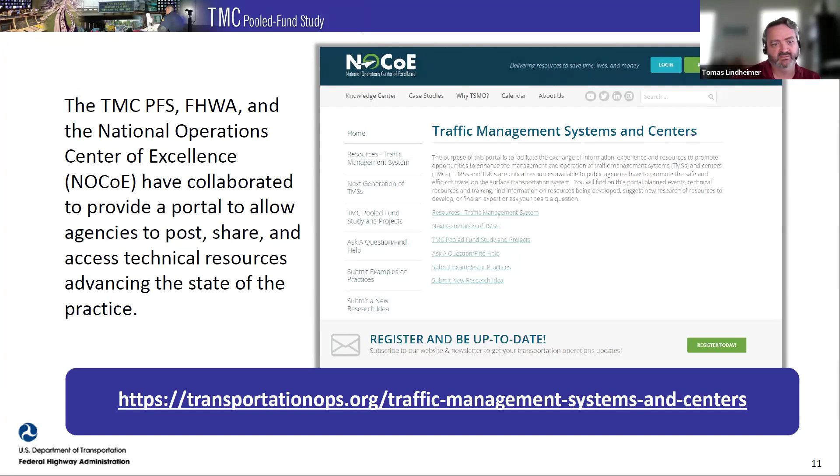NOCoE and FHWA are co-sponsoring webinars on each of the TMC Pooled Fund studies selected. Today's webinar is about using variable speed limits during adverse weather events, but we have regular webinars every other month on 12 emerging TMS topics through 2026. Visit NOCoE's TMS emerging topic website for more information.

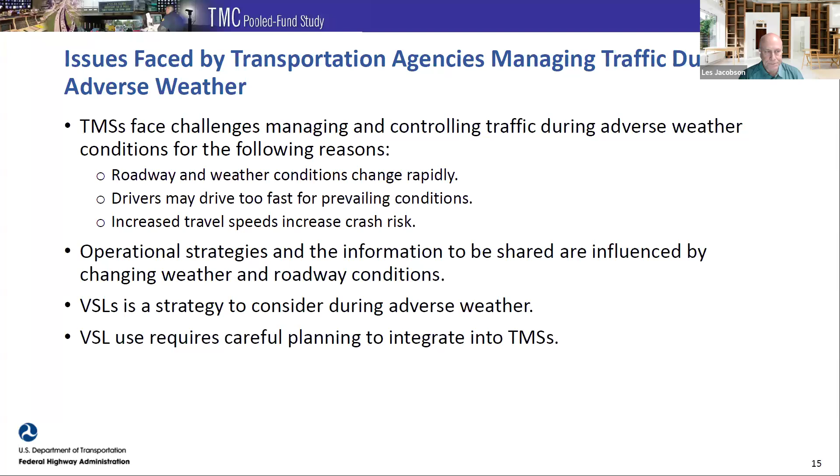Variable speed limits, or sometimes variable or dynamic speed advisories, but mostly for weather it's variable speed limits, help to manage traffic, to slow traffic down, to improve safety and reliability when there's adverse weather. Agencies will alert drivers of what the conditions are, and then encourage them to slow down by posting a lower speed limit, and then also displaying the conditions they're about to experience on changeable message signs.

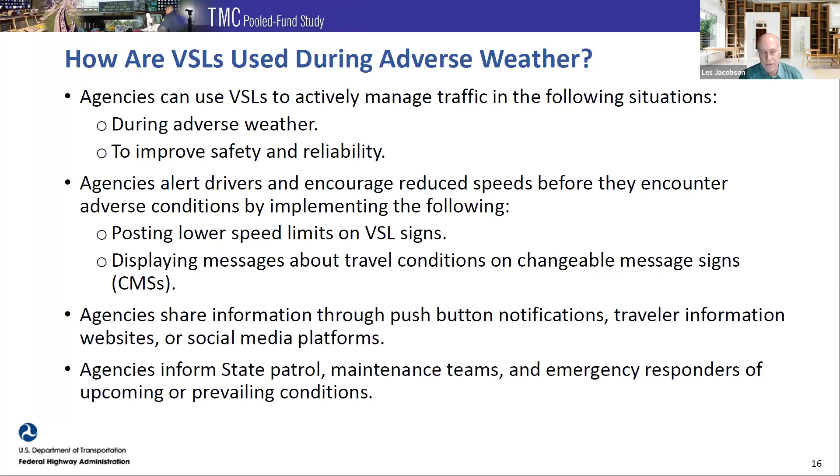Agencies will also share information through a lot of different notifications, through traveler information websites, on social media, a variety of ways that they can share that information to drivers and to the media and others who are interested. They also will inform other public agencies like state police or state patrol, maintenance teams, emergency responders, all of the people who may need to deal with traffic in adverse weather conditions.

Some of the benefits we've seen from variable speed limits in areas with adverse weather: first, to improve safety and reduce the number of crashes. I think that's the number one benefit, and that's why we have it listed here. It's primarily a safety issue. It also helps reduce crash-related road closures, helping with maintenance overall and reducing the load on maintenance workers and maintenance funds. Also, it increases driver awareness on why travel speeds are being adjusted and the importance of slowing down in these conditions.

We've also seen positive before and after results. For example, Ohio DOT showed that they reduced crashes during snow events by 35%. Ryan will talk more about that later. They also decreased injuries and fatalities from 20 to 9 crashes per year, a pretty substantial reduction. Wisconsin DOT found that they reduced average vehicle speed by 13%. And Utah DOT found that they improved speed limit compliance and significantly reduced crashes as well.

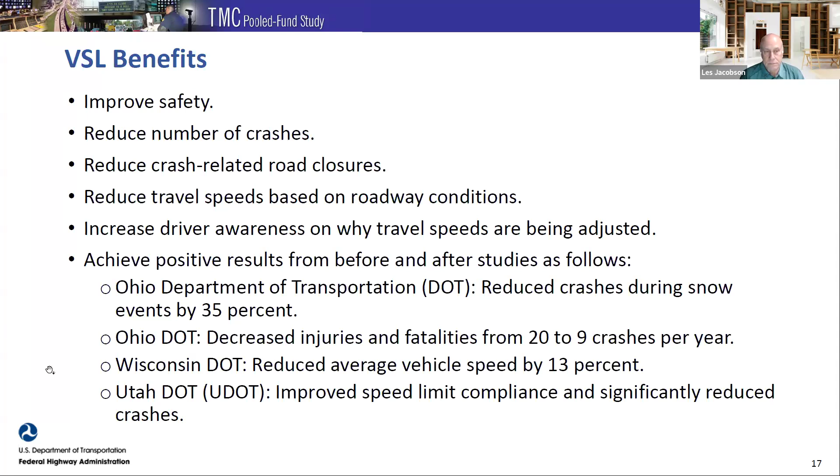So what people want to do reflects a lot of those benefits. Generally, the desired outcomes of using VSLs during adverse weather is to improve safety, to improve travel time reliability, to reduce vehicle speeds and speed variations, and to improve driver awareness of the adjusted speed limit and compliance with it. A lot of studies have shown that if people understand why they've been asked to slow down, they're more likely to slow down. I think that's one of the most important things.

Also, you want to be able to manage that variable speed limit based on changing circumstances. So it needs to be somewhat dynamic, so those speeds can be changed based on the changing roadway and weather conditions. Also, another desired outcome is to share information and coordinate with emergency responders and service providers.

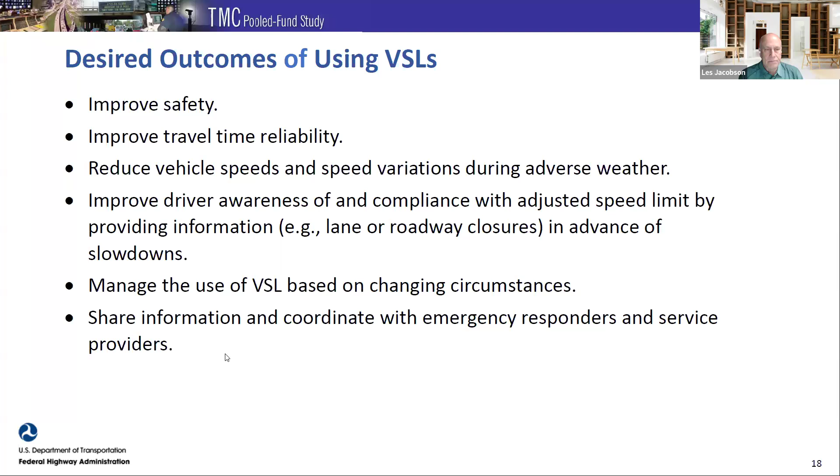Some of the things agencies consider when thinking about using variable speed limits during adverse weather conditions is, first, enforcement: should there be regulatory or advisory speeds displayed? I think very often with adverse weather, the regulatory might be more important. That's a personal view of mine. I think it has a bigger impact.

Also need to think about effective sign locations. Where should the signs be? That will depend on what the normal weather conditions are and how far in advance speeds can be reduced and reduced effectively.

Also, what other operational strategies should be incorporated into this overall traffic management during adverse weather? It's important to realize that the benefits can vary quite a bit from site to site, and there's a lot of uncontrolled factors, such as the mix of motorists and how aware they are of the events that are going to result in variable speed limits. People new to an area, not experienced driving that stretch of roadway at that time, may be less aware, and that can affect how beneficial it will be.

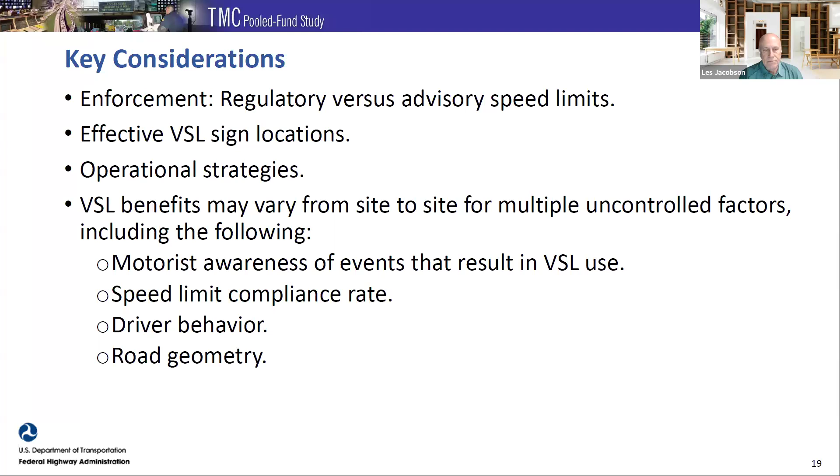Some of the challenges with implementing variable speed limits: because benefits vary from site to site, that's a challenge when trying to say what those benefits are. In some places they may be lower, some places higher. As one location opens after another, there may be some that have better benefits than others, and people can question why, if there's a drop from one location to another, why did you choose that.

Typically compliance is lower if the speed limits aren't enforceable. Another challenge is that areas across the state or region may benefit from knowing when and how to change speeds, which means there's a challenge in getting that information out to the driving public, and then conveying the relevant information so they understand why and how variable speed limits are used. Finally, sometimes there are challenges applying policies and procedures consistently across a region or state.

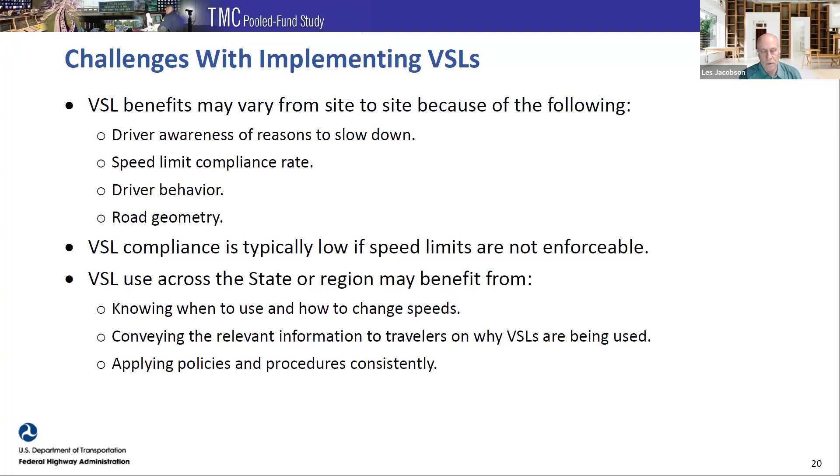Some of the support for using and managing VSLs includes traffic management systems needing the capabilities and resources to support actively managing those variable speed limits. That's one of the most important things about dynamically managing variable speeds: having a central place that it can be controlled from, a traffic management system that can do that.

Those traffic management systems need to be able to collect and process data. They need to disseminate information to travelers, emergency responders, and other people who need to know about the conditions. And then the TMSs need to continue to monitor how weather is affecting traffic.

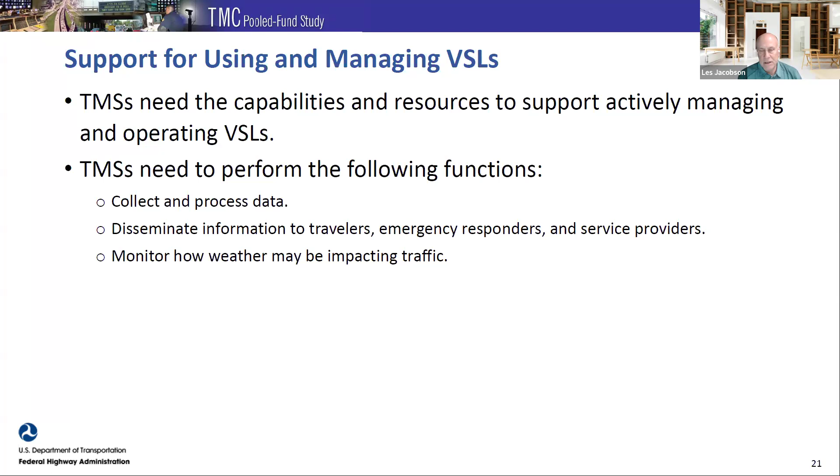Some of the issues to consider when incorporating variable speed limits into your traffic management system include thinking through the operational requirements of the system. Those requirements are pretty similar to a lot of other traffic management system strategies. There's also probably a need to establish formal operating procedures for when the variable speed limits are operational, and how to support and operate the system.

The traffic management systems may also need to automate the operation of VSL, depending on the conditions and how quickly they change. But at the same time, an operator needs to be in the loop so they can monitor what's happening with the system, make sure it's reacting correctly, and make changes if needed based on experience and different conditions. And then the TMS needs to be able to communicate with responders and other agencies.

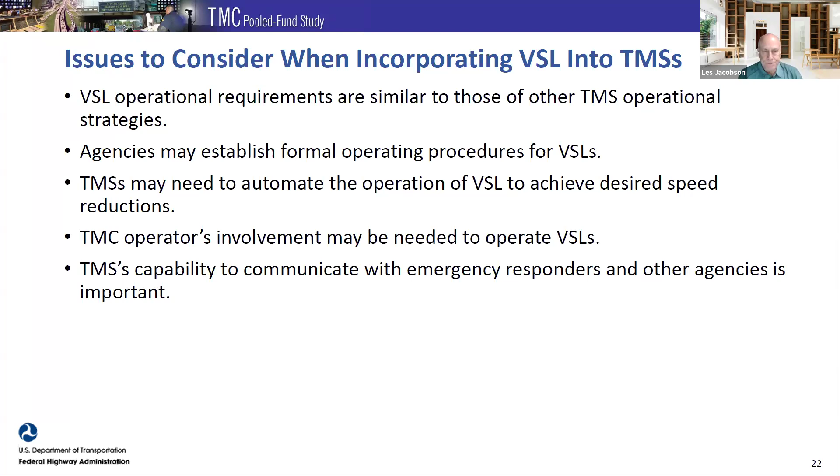There's also the benefit of having variable speed limits with changeable message signs, as we've mentioned throughout. That's a way to get information to the driving public, and they're important for traffic control purposes. The messages need to be easy to understand, just like any other changeable message sign, and there are documents that can help show how to effectively use CMSs.

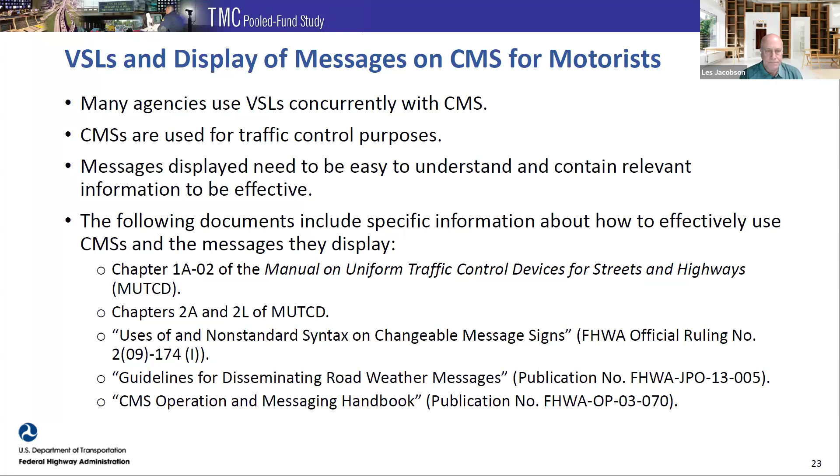Here are some considerations. It's really important to know what your staffing needs are going to be, including number of staff and how to train them. It's also important to think about whether this will be a regional or statewide implementation. Finally, review the processes and procedures that are needed, and evaluate the availability of the devices to provide travel condition information.

I'll show a few slides on some of the things that occur. Typically, a scenario for changing speeds might involve information about expected snowfall. The operator decides to change the speed limit, or the system sees that there are changes. Other things may occur too - visibility declines, grip factor might decline - and based on those changing conditions, the operator looks at adjusting the speed limit.

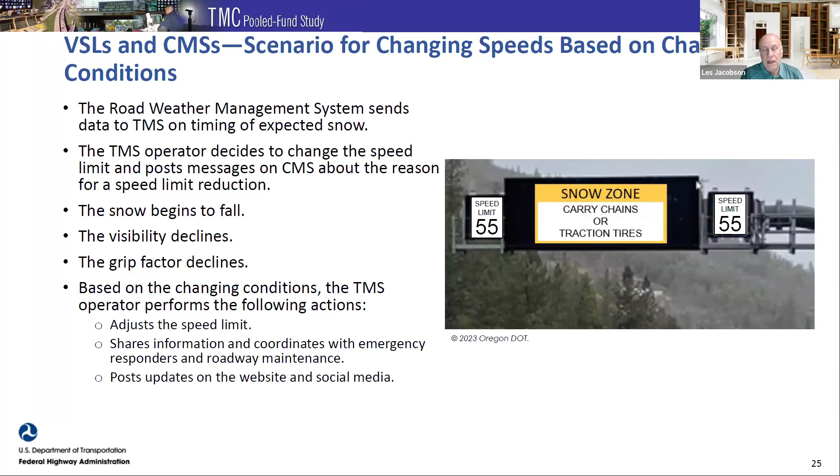Ryan's going to talk more about Ohio DOT, but they looked at staffing and training needs, and he'll be talking about that. Oregon DOT integrated their speed data and closed circuit TV into their TMS to help with the variable speed limits and changeable message signs. A lot of DOTs have deployed VSLs along routes with a history of crashes, and Ryan will talk a bit more about Pennsylvania's experience.

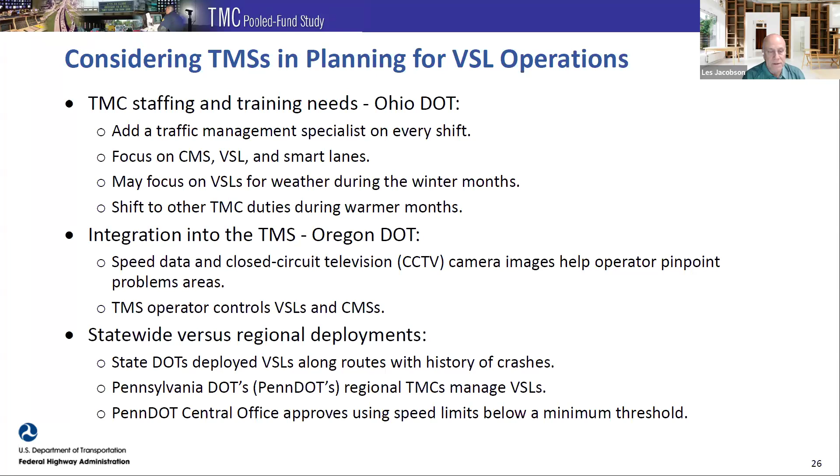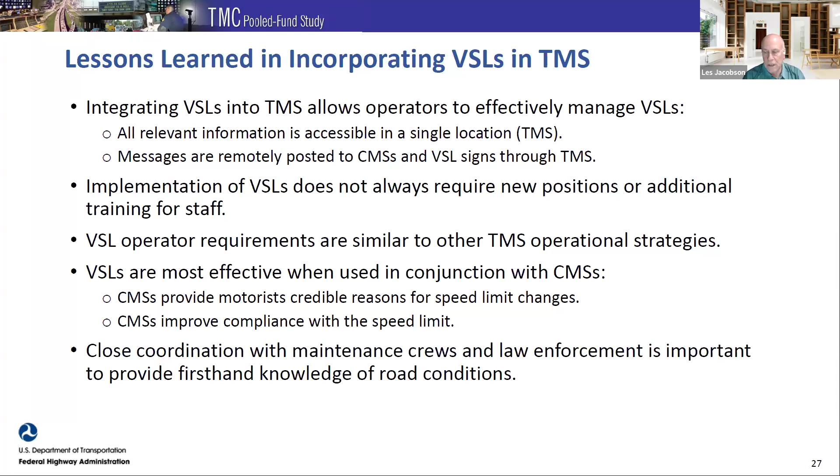Some of the lessons learned include: it's important to integrate VSL into TMS. The implementation of VSL does not always require new positions or additional training of staff - it depends on what staff there is and their experience. But it's important to note that the requirements for operators are similar to other TMS operational strategies. And the use of variable speed limits is most effective in conjunction with changeable message signs.

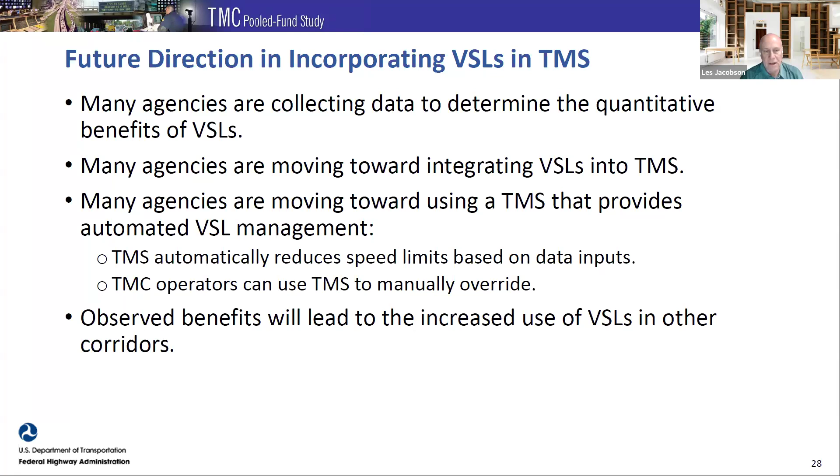Some of the future direction includes collecting data and being able to show those benefits. It's also important to look at how one corridor or one segment of VSL can lead to increased use in other corridors as well.

Thank you very much, and I'll pass it back to Tomas.

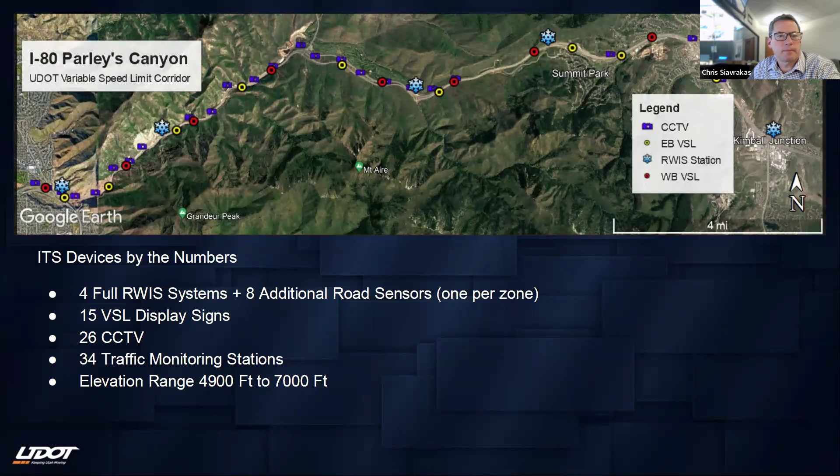A little bit more on the zones here. So we originally had this as where the region traffic engineering staff would change the speed limit based on their observations of looking at camera images, looking at speed data, and they would make a determination. The zones were broken up into just a couple areas. But then once we went to automation, we increased the number of zones, basically bringing them to much smaller segments where we can change the speed limits. So basically every speed limit sign can be different from the one downstream of it.

Now we have some parameters to keep it smooth so we don't have huge breaks in that change, but we went through a pretty significant shift from our first variation of the speed limit system to bringing in more automation components. What happens there is that all the traffic monitoring stations are picking up the speeds from travelers on the roadway already there, and they're helping us determine what the speed should be. We kind of call that voting for the speed. That helps the algorithm figure out what we should be posting on the upstream sign of that zone.

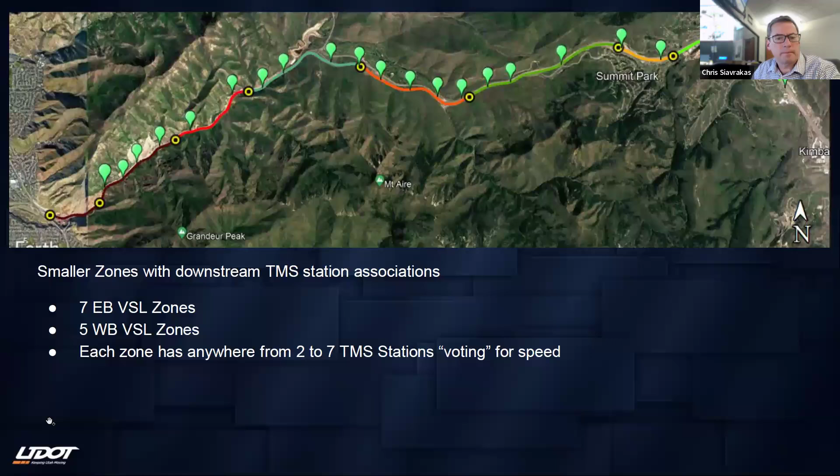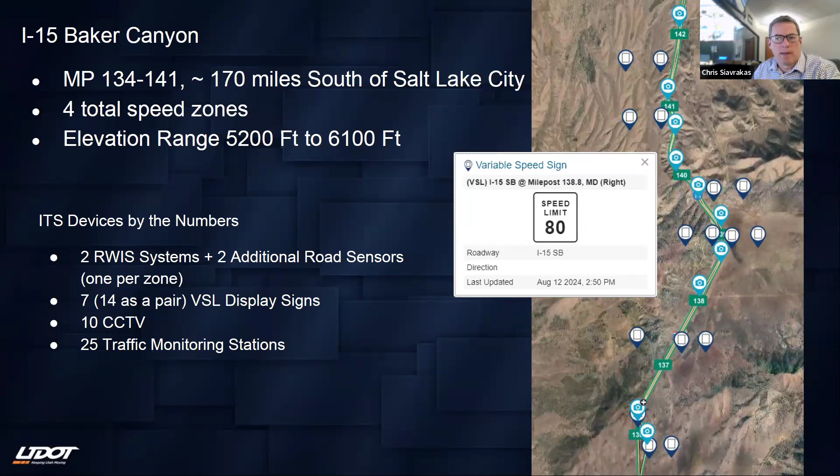It's white knuckle moments where you're trying to just navigate this corridor. You're trying to get somewhere. If you had a choice not to be there, maybe that's your better choice, but sometimes people still have to get through the corridor. Helping them understand what those travelers downstream are doing with their speed helps us make the calculations on the speed as they're entering the corridor, so they know how to target their speed if they're unsure of the situation they're dealing with. It just helps reinforce where they ought to be trying to find their target speed for what's lying ahead.

For about 10 years we've been working on this technology, going through a couple rounds. I mentioned our automation development, and the exciting part about this, I want to give time to Cody after I'm done here to talk about the weather aspects of how we use weather information to change the speed limit. We've enjoyed having this experience and time to develop and improve steadily through the life cycle to date.

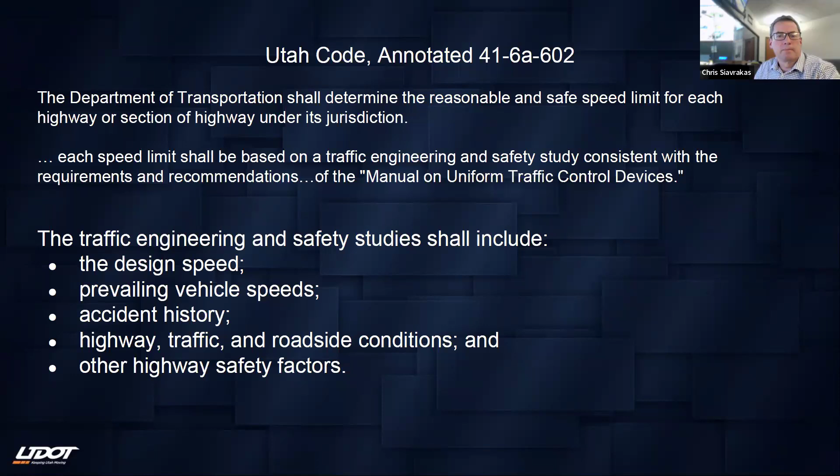So in reference to how we can do that, our state law gives us that authority to do so.

This is out of the Manual on Uniform Traffic Control Devices. There are two sections that discuss engineering study, and the procedure we're talking about here is the application of procedures and criteria established by the engineer. We have an engineering team that reviews this and decides how this process is going to work. That's our interpretation of how we're applying that authority to make that determination in real time for traffic speed limits.

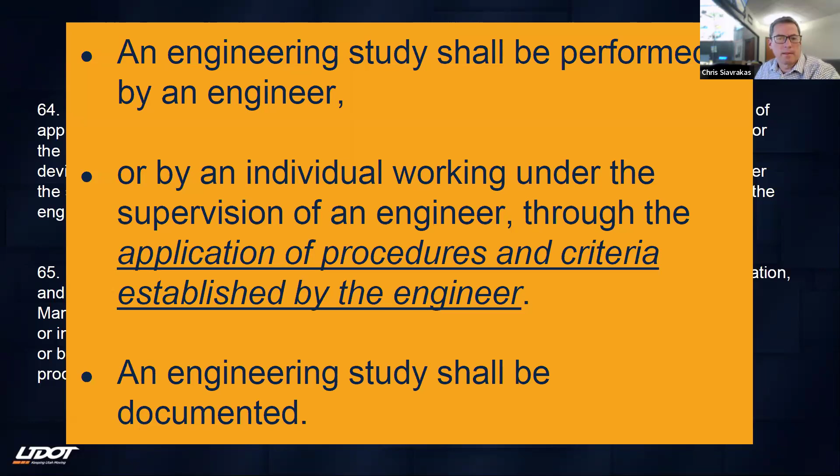Okay, next slide. So, challenges I've mentioned before: in Utah we subscribe to the prima facie speed law, or basic speed law as it's also referred to, which is basically whatever is reasonable and prudent for the prevailing conditions. So we have to take samples of what the population decides is safe for them to navigate that corridor, and we average that to come up with a number that should be the speed other people follow. That's why we call it voting for the speed - they're basically casting their vote when we collect that data sample from a sensor. That's their choice of what they think the speed should be.

But the sample size is impossible to make statistically significant because it's going to change every 3 to 5 minutes. We may only get a dozen, maybe 100 vehicles on a busy day through a corridor during a few minutes' interval. So we have to be comfortable making that change within a small sample size.

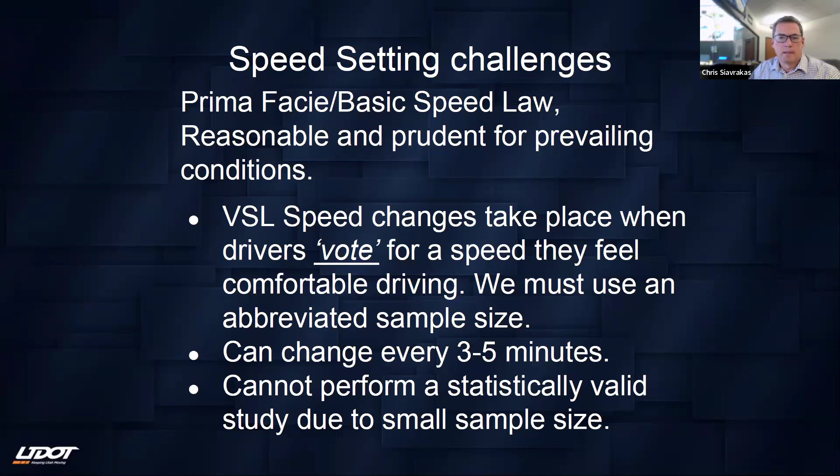We also anticipated that we don't want to get stuck in the records request process. We basically publish on our website all of the commands for each of the signs that give the speed to that sign. Now, we can't prove what was actually posted on the sign - we can only demonstrate what was given from our TMS software as the instruction to the sign. So Highway Patrol, citizens, or anybody wanting to do research can go to this website link, download it, pick the signs they want, and export it into a CSV file or a PDF. We don't get involved in the records request process; we just make it available to anybody.

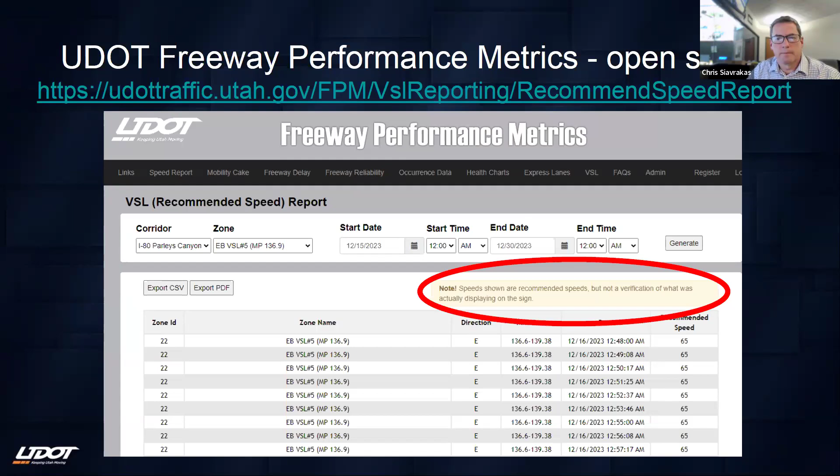As Chris mentioned, we wanted to see how we can integrate RWIS into this. Most states utilize RWIS for their VSL system. So initially when we did manual changes of the VSL speeds, the operators or engineers looked at weather data, but most of that manual transition was delayed. There was pretty good latency. And then the automation was solely based off speeds, as Chris talked about.

But we wanted to see what we can do with the RWIS data to improve things. So we decided that when weather is coming in, we wanted to get speeds lowered before drivers have to start to react to the changing weather conditions.

So what we decided is, when we see some variables indicating weather's coming in, we'll lower that speed limit ceiling, as we'll call it, down 5 miles per hour in Parleys, which we haven't initiated yet, but hopefully this winter we'll have that going. And 10 miles per hour on the I-15 section, since it's a higher speed limit there. After that speed limit ceiling, the vehicles voting drops the speed further. But the whole idea with RWIS is just to catch people initially and get them to slow down.

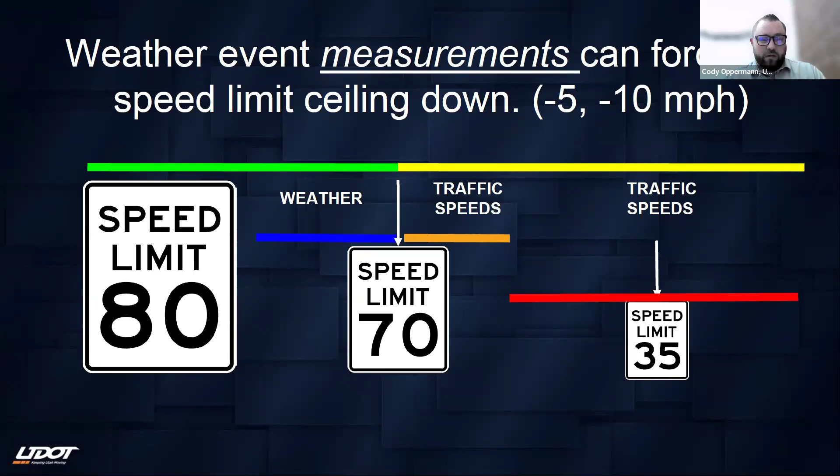There are 5 different things we look at. I was looking at Wyoming's slides, and they do a similar thing, and I think other states do too for certain weather scenarios. We look at a sample RWIS tower here with the different instrumentation being used: standing water on the road at a specific value, low visibility, high winds, the road grip or coefficient of friction deteriorating, and a complicated algorithm for snowfall rate.

If we start to see any of those observations showing deteriorating conditions, that will trigger the lowering of the speed limit ceiling. We originally had 10-minute observations. To reduce latency, we went down to 5-minute observations. Because we want to see a deterioration in conditions, as well as weed out any one-off bad observations, most of these conditions take 2 subsequent observations to show a deterioration or that conditions are bad enough.

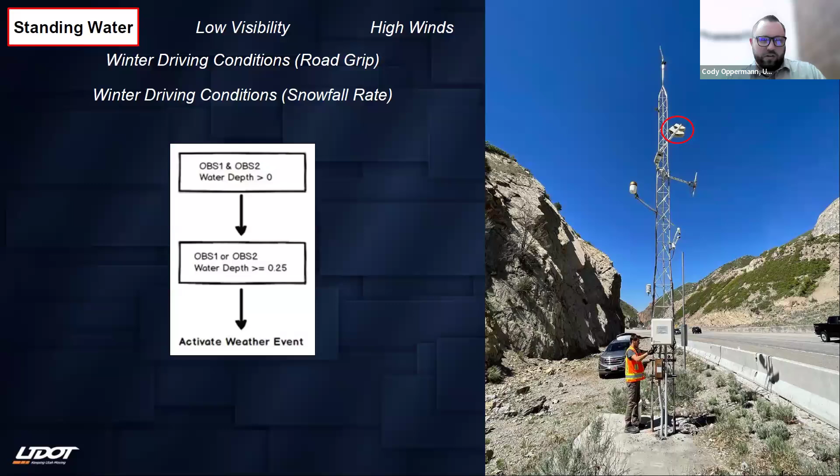I'll gloss over the next few slides, but you can look at these flow charts for what initiates a weather event. For wind gust, we trust that data enough that if there's a strong wind gust for one observation, that will trigger the VSL. Both of these corridors aren't traditionally a high wind or crosswind problem, but we have that in there just in case.

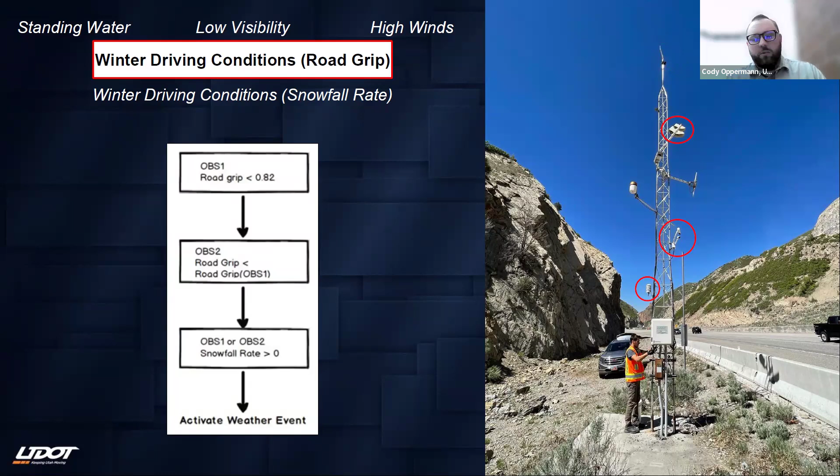At the end of a weather event, as conditions start to improve, we notice people's speed starts to dramatically increase. But we didn't want to say, hey, go full speed just yet, since there could still be problems in the corridor with weather still having an impact. So all these variables can be tweaked based on the zone that we're in.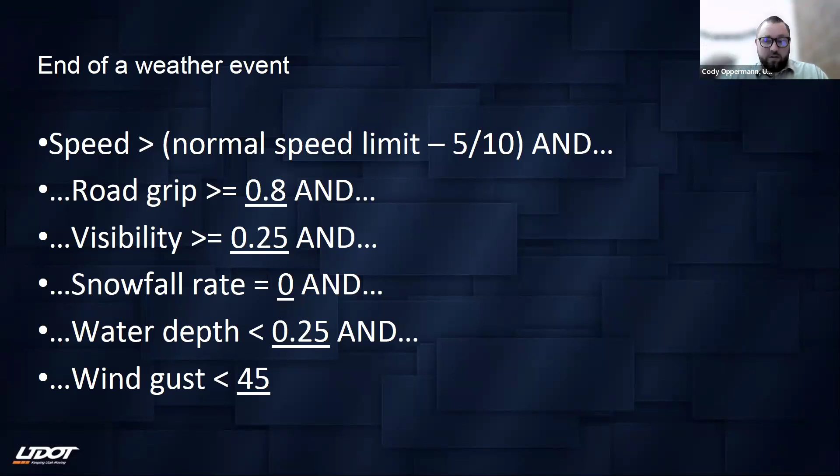We at least have a full RWIS station in each zone, or at least a road sensor to determine some of these variables. That impacts the zone it's attributed to, and can filter if just one zone is being impacted, then adjacent zones go back to normal speeds, but it will at least flag that the entire corridor could have weather problems. At the end of a weather event, we need to make sure all the variables come back to a safe condition for speeds to return to normal.

I was going to show a quick example from last winter. We noticed an issue with our algorithm that we need to go back and fix in the I-15 Bakers Canyon section. This graph shows the average speed—that's kind of a complicated thing how we come up with that. The orange line is what that ceiling speed should have been, and we should have triggered an event sooner and ended sooner.

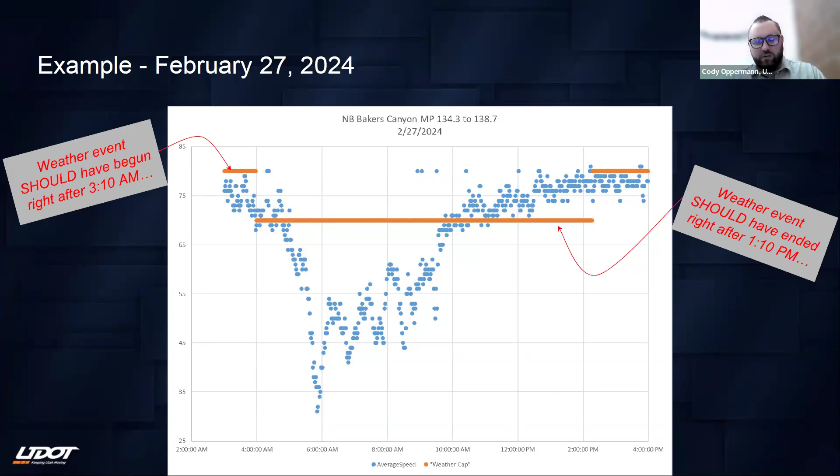Next slide. I took an example from a long time ago of how this should have operated. This was back in 2020, a storm that happened in November. You can see the weather variables there. I've highlighted some where we're starting to see an uptick in the snowfall, and coefficient of friction started a slight decline. This chart on the upper right shows the aggregate speed across the lanes on this eastbound zone.

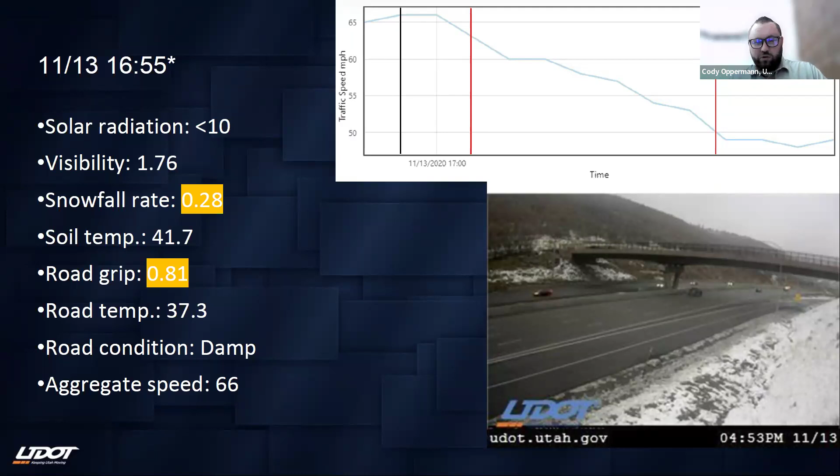Next slide. I had to interpolate the RWIS data since we were taking 10-minute observations, but let's say it was 5-minute observations here—you see the snowfall rate ticked up a little more, road grip stayed the same, but we haven't triggered any of the thresholds from our algorithm yet, and speeds are still elevated.

Again, conditions are deteriorating, but not quite yet. Next slide—we've hit our thresholds for a weather event to begin. The aggregate speed there is 63, so at this point we would have theoretically lowered the speed to 60 and gotten people aware. You can see in the camera image how the storm has picked up.

We also look at two subsequent observations in case you had a passing flurry over a course of 5 minutes that we didn't want to pick up on, in case the weather data returned to a better state. So it had to show a deteriorating condition, and this is how this would have worked theoretically. Next slide.

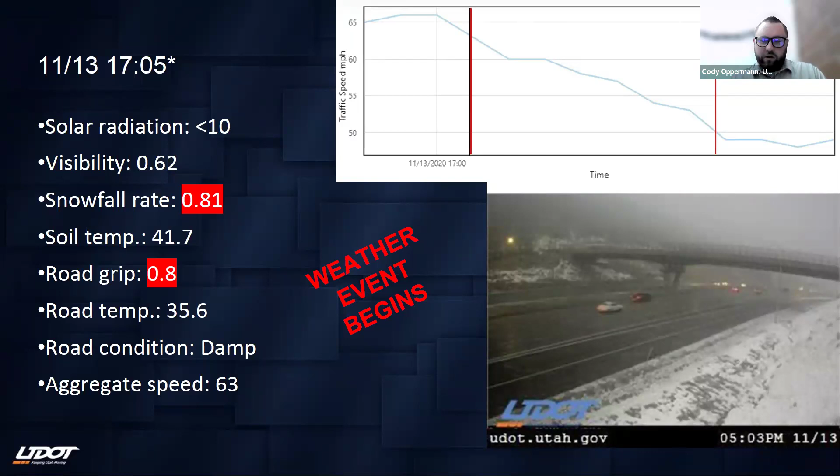There are some various groups doing research here, and Chris mentioned the machine learning project that we're doing, so I won't spend time here. Next slide, and then there's our contact information if you have any questions.

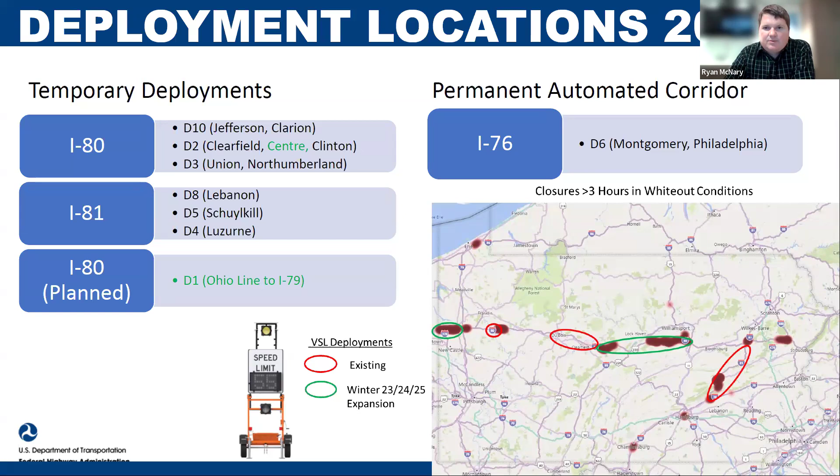So this is what the devices look like if you're unfamiliar. We have them deployed out there, a lot of times behind guide rail to protect them, and we work with our local district engineering districts and maintenance crews to build pads for them. They work off solar with battery backup—that has been some maintenance concern for the devices. Some of these are around 3 years old; we're working on that, and we've had to replace some batteries.

Another thing we're working on right now is modem optimization. These come standard with either a contractor modem, but from a DOT perspective you're going to have to consider your comms and bringing them into your actual ATMS and control equipment. So we are in the process of bringing them into our corridors module, as we call it in Pennsylvania—essentially an active traffic management module that has our RWIS station and speed data, so we can automate these things.

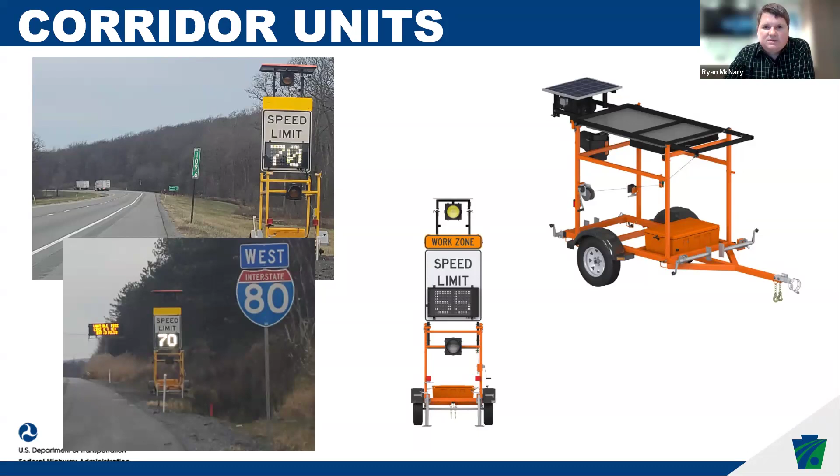We're getting to the point where this winter we're going to be piloting automation around weather, much like what Utah just talked about. So these are the devices we have out there—we're swapping out around 90 modems currently, and moving forward we'll be able to use the algorithms we build into the existing corridors module. So you can keep going.

So how did we pick these locations? We ran a lot of data. I think we looked at tens of thousands of RWIS station readings to understand where would be the primary locations we consider.

Now, if you're not familiar with Pennsylvania geography, we have the Appalachian Mountains. They essentially run from a little west of Pittsburgh to the Harrisburg area, which is the I-81 corridor through to Allentown, and if you're following that up to New York City, up to Maine.

Now they're not as big as the Wasatch Mountains out in Utah, but there's some significant grades. And we get a lot of crashes, and unfortunately those major pileups that we never want to make the news about. So we decided that this was going to be a solution for us.

And you saw the corridors earlier, and it seems that we're going to be expanding this statewide in other policies for our core roadway network. But what's showing in front of you is of those tens of thousands of readings from the RWIS stations.

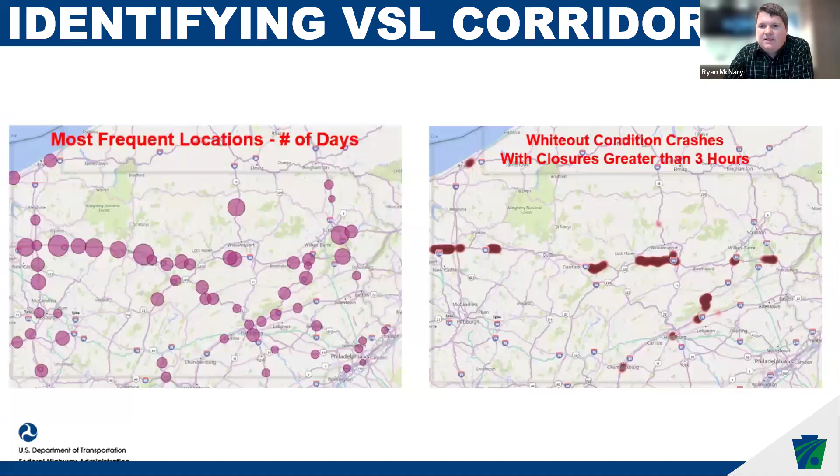The larger the circle on the left is the number of days that saw what we would consider whiteout conditions. It was something that in our study we determined what a whiteout would be from a DOT perspective. And on the right hand side, we correlated that with crash data to understand where we had those bad crashes and when they lasted 3 hours or longer.

So we took it a little further. Some of you might have seen me look at this before, but this was the start of our automation. We're trying to do what Utah is doing, get ahead of the storm. So it's a little different from a weatherman perspective. We're trying to prevent crashes here. So we're looking for that tipping point and that likelihood of a crash.

So we have low visibility, high wind, freezing surfaces, freezing rain, and slippery surfaces. The freezing surfaces and the slippery surfaces is what we're trying to pilot this winter. We see a lot of times that initial changeover of the storm is when we get a lot of our crashes. A lot of people aren't expecting it.

The variable conditions come in quick, and we're gonna shoot to have the VSLs and then the associated CMS boards to help protect those areas around where we have RWIS stations.

So we have around 95% RWIS station coverage on our core roadway network. I've said that a couple of times now. That's around 4,000 miles of roadway in Pennsylvania. We manage around 40,000, so it's roughly 10%. So it's your interstates, your interstate look-alikes, and your major arterials.

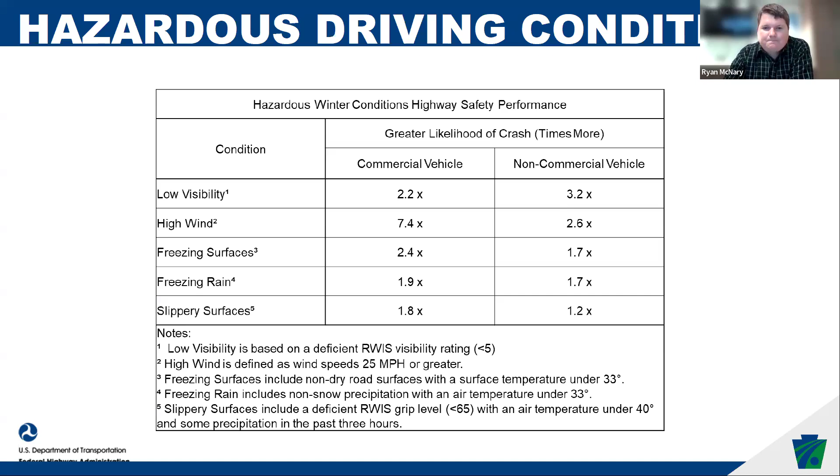So in Les's introduction, and I think with what Utah talked about, part of making this successful is CMS support. We've now piloted for a couple of years. How can we automate this? And we started with queue protection.

We last year did high winds and whiteout conditions in our Erie district, where we get the most snow, and in the I-80 district in our northern tier. So what that does is it pulls those readings based off the visibility less than 1 mile, the rain state medium to heavy snow, and rain intensity above 0.04 inches per hour.

Now, so I alluded to this earlier, that doesn't constitute a whiteout to a meteorologist. But for us and for the drivers, and you're traveling at significant speeds, it makes it very difficult to drive. And that was our threshold and our tipping point where we wanted to, in those 15-mile radius, post these messages as people were approaching these conditions.

So we do that for high winds too. We have some bridges that are exposed in central Pennsylvania where we essentially soft close the bridge if they reach speeds above 50 miles per hour. It doesn't happen often, but we do that for specific bridges and corridors around the state as well.

This automating of messages was a work in progress with your TMCs, I'll be honest with you. Working out the priorities, working out how they override incident messages, working out how they override with vehicle restriction messages is not an easy process, especially when you have a lot of decentralized management. So I would say put some effort in the beginning of that. You're going to try to figure that out.

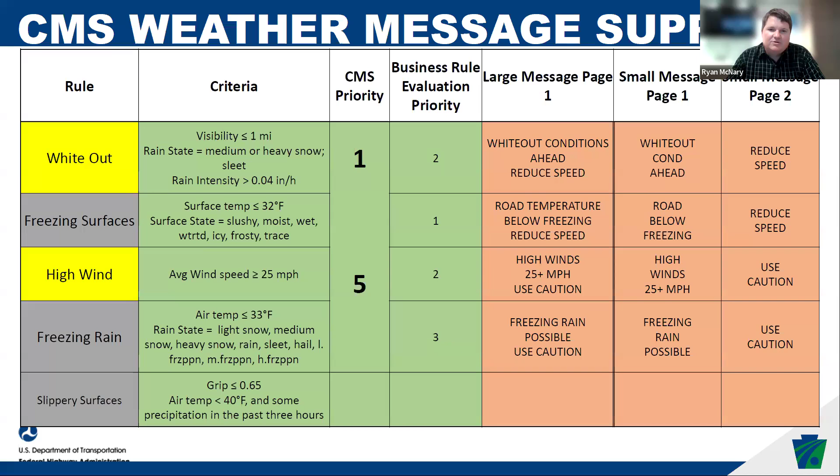So how we had to figure it out for our ATMS system is we needed a business rules engine. There are just so many variables that are going to go out there, and they change by every geographic area. One 15-mile radius might be a valley, the other might be a peak of a mountain.

So what we've done is we've brought a business rules engine into our ATMS platform that has the ability to look at slow or stop traffic. That uses the INRIX data. And then it looks at the mile differentials of where those speeds are. If those speeds cross a threshold, we can lower the VSLs ahead of those speed drops, and then also post queue protection messaging.

And we're going to use that same methodology for weather as well. Right now, you can see at the bottom, the weather station search is at 15 miles, and then we can customize it by corridor. The example you see there is District 1, our Erie city area, on I-90, which gets the most lake effect snow in Pennsylvania. So you can go to the next slide.

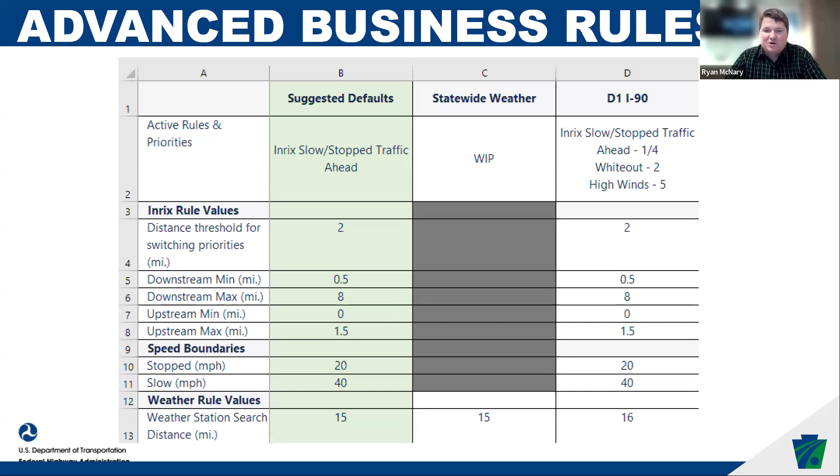So where I am today, I'm actually at our statewide TMC operations meeting in north central Pennsylvania. I'm in Clearfield right now, talking from their TMC.

They were our first portable VSL, or temporary VSL, corridor, and we deployed this in the 2022 winter season. There was an unfortunate major pileup that caused a fatality in 2020, and a legislator asked us to essentially come in and work on something.

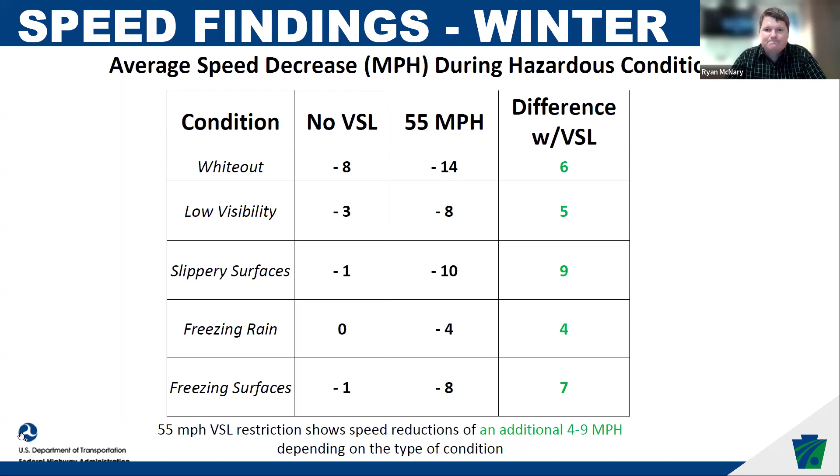So when we do actual 45 mile per hour speed restrictions, which has to be approved by what we call our area command—where I work in Harrisburg—we have to figure out those speed drops. I don't per se figure it out, but it's a collaborative effort with a lot of different agencies.

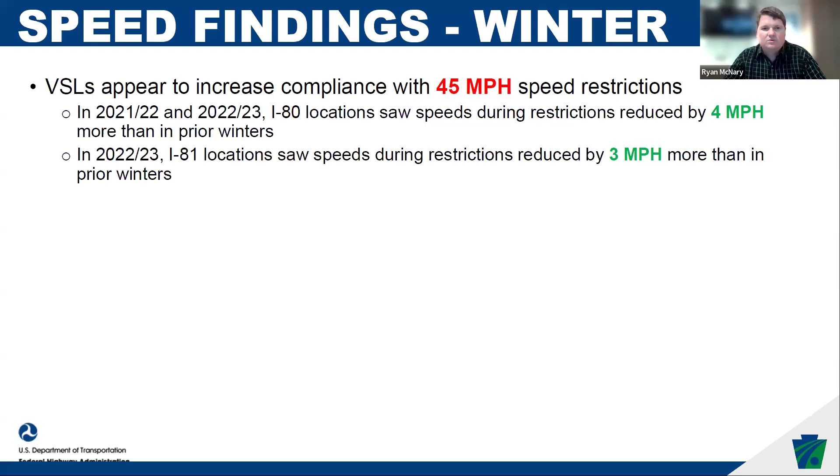We see that in the areas with VSL, we see an increased reduction of 4 miles per hour on the I-80 corridor, and on I-81 we saw an increase of a 3 mile per hour drop in travel speeds during the last two winters. We have data. Go to the next slide.

So this is similar to what Utah went over, and this is kind of my segue into automation and where we're at here in Pennsylvania. We have all this data, and we're trying to figure out the algorithm that we want to use.

Go ahead, you can go to the next one.

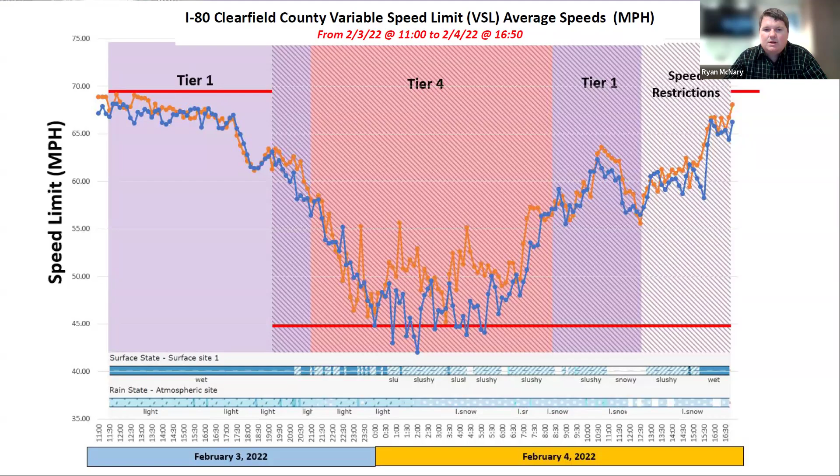So automation, this is the first time I'll talk about this a little bit, and Les alluded to it a little. We're seeing that our operators, and from my personal perspective, I think it's a hard job for our operators to become meteorologists, follow the weather stations and then get them out there. It's a lot of responsibility for them to do that. So we're moving this way.

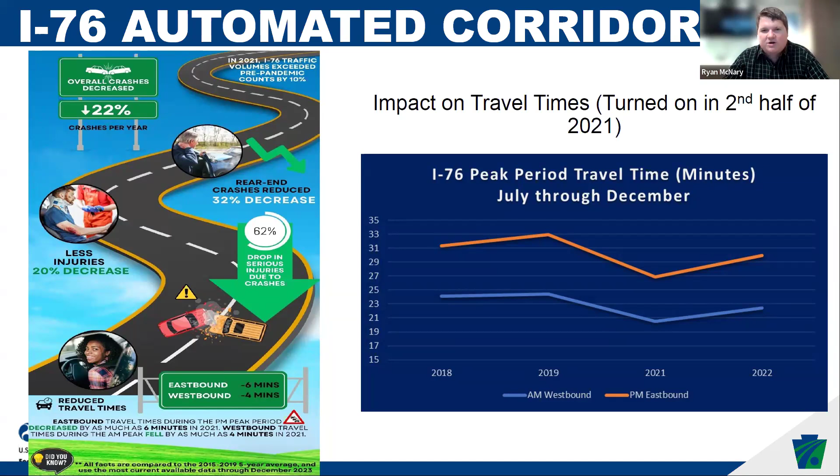I know we're not talking about travel times right now, but travel times were greatly impacted as a result of this in 2021. But as things go in the transportation world, behavior changes. I think people get used to a system and they just start neglecting speeds. So we've seen the travel times go back up, and we're going to be issuing a press release with this information here in the future. But this is my pitch for automation, and we're working towards that here in the future. So thank you for having me.

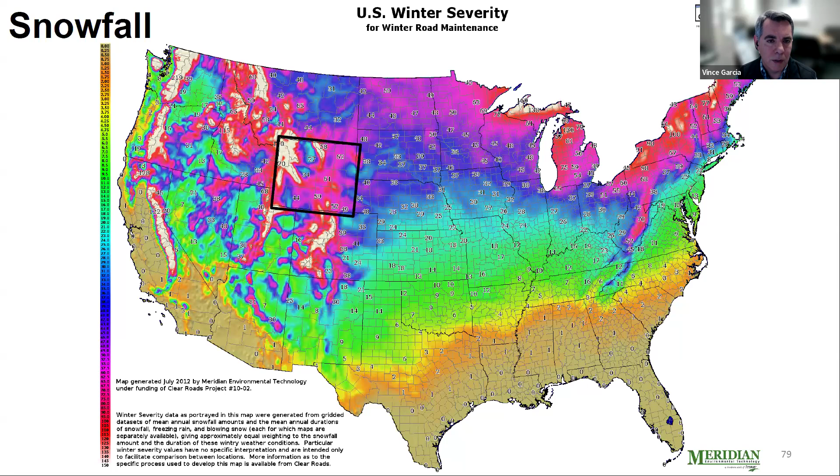Same thing with winter severity. Certainly we have severe winters, but so does everybody else. Next slide, please.

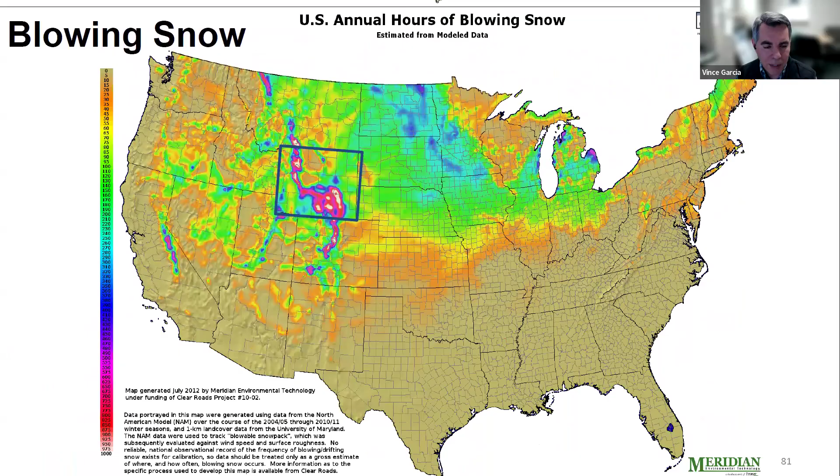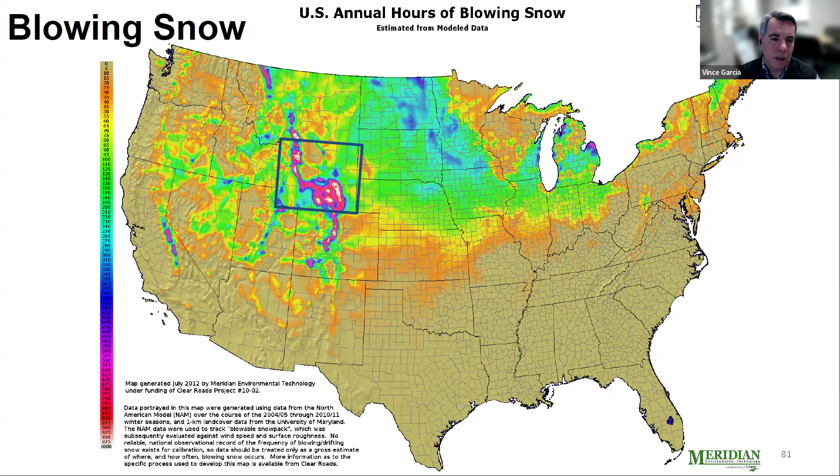The thing that makes us a little bit unique is that we have a lot of blowing snow events. Where you see that kind of hot spot right in the south central, southeast Wyoming, that's exactly where Interstate 80 crosses the state, and Interstate 80 in Wyoming is commonly comprised of about 50% truck traffic. Next slide, please.

So that combination of weather events and a large number of trucks results in a lot of multi-vehicle crashes. Please, next slide. Next slide again. Not sure what happened there.

What I wanted to let you know is that if there is a crash involving a passenger vehicle, especially when we come to these vehicles with a lot of truck traffic, the passenger vehicle really has no chance. So back in 2008, we had legislation go into effect that allows us to use variable speed limits for a weather or vehicle emergency. And again, it says we can use variable signs to do that. So next slide, please.

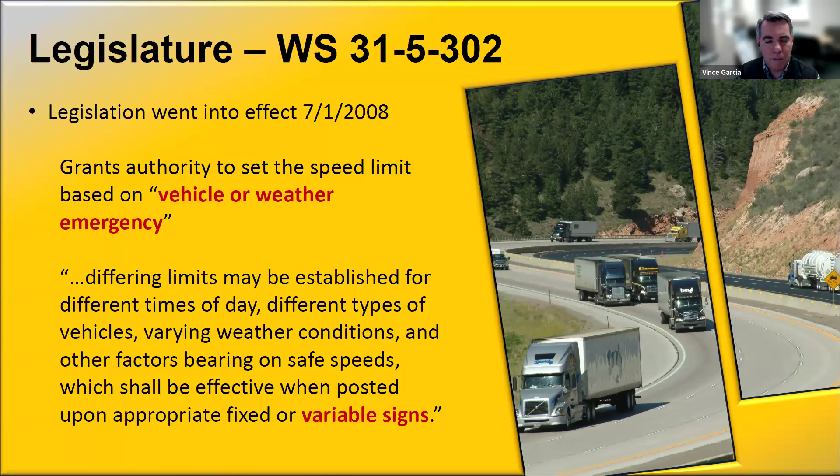We think of variable speed limits as a system of systems. We insist on having a road weather information system in a zone. We also have the sign itself, and we include speed sensing. In our case, we're very rural and don't have great communications. I know a lot of states are blessed with fiber optic capability, but our emergency communications personnel have built a statewide radio-based network, so most of our systems are controlled by radio.

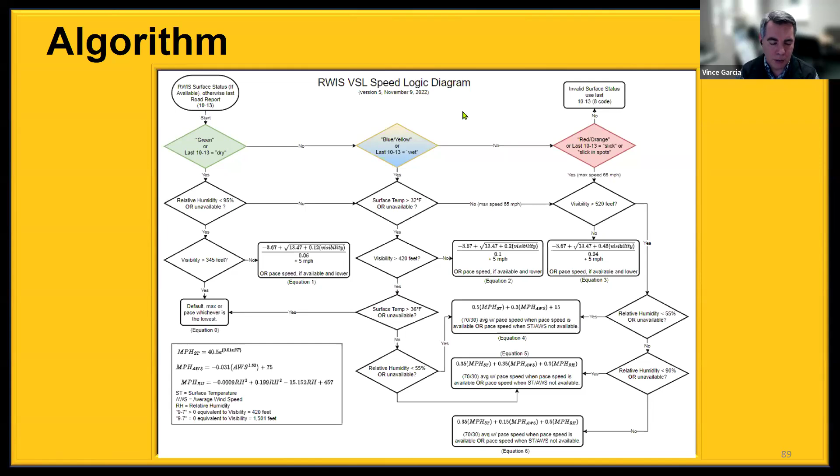We built an algorithm that's largely based on stopping sight distance, but it does include variables such as weather conditions as well as speed conditions.

So what we're really trying to do is tighten up the speed distribution. As you can see in the green histogram, looking at the 100 on the left-hand side intersecting with the green, in this mythical situation it works out to about 55 miles per hour, with 100 vehicles also traveling 95 miles per hour. What we really want to do is tighten up that speed distribution.

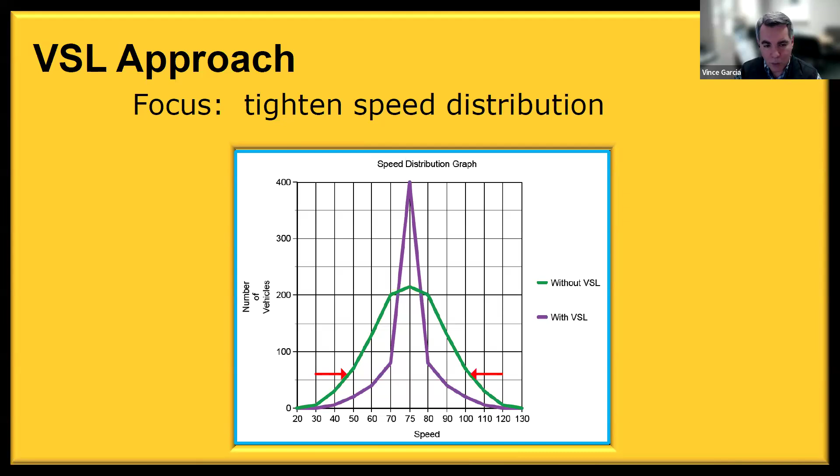The other thing we want to do is make the speed sensible for the roadway conditions, so we want to push that speed limit back and tighten it up.

One problem we saw was that we struggled to get the speeds raised properly—I think Utah said the same type of thing. So we've come up with additional ideas for a semi-automation process to raise those speed limits more rapidly.

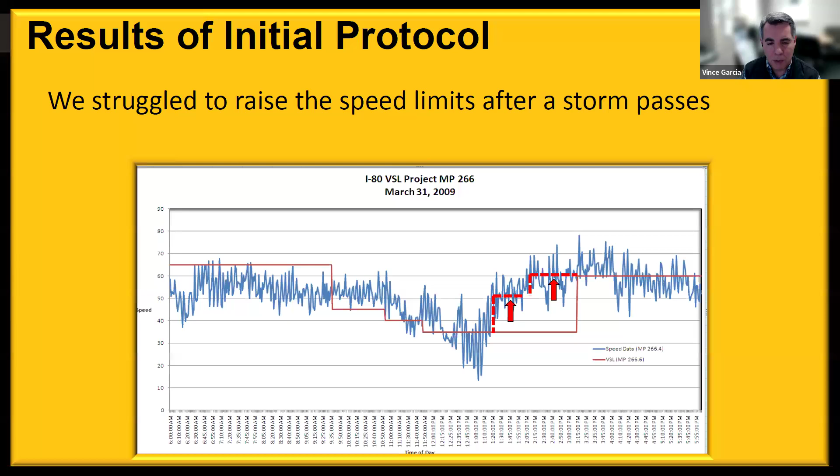What we did is come up with a way to integrate and automate—again, semi-automation, because we have our algorithm based on stopping sight distance, our road weather information systems, and we also involve our AVL. If there's a patrol vehicle—and patrol is part of WYDOT here in Wyoming—we allow patrol officers and maintenance people to tell us if we're wrong on a variable speed limit, so if they're in the zone we'll ask them. We had to come up with a process to take misfiring AVL information, misfiring RWIS information, and any misfiring speed sensing data and exclude it. Then we push that information with a recommendation directly to the Transportation Management Center.

We have a process we call the data broker. That information pulls from a lot of different sources and pushes directly to a product from the state of Minnesota called IRIS, our advanced traffic management system, which turns that information directly to the roadside. So the TMC does see all the information. They have the opportunity to review it with a person on the ground, or they can let it push automatically—if they don't act in a certain amount of time, the information is pushed directly to the roadside.

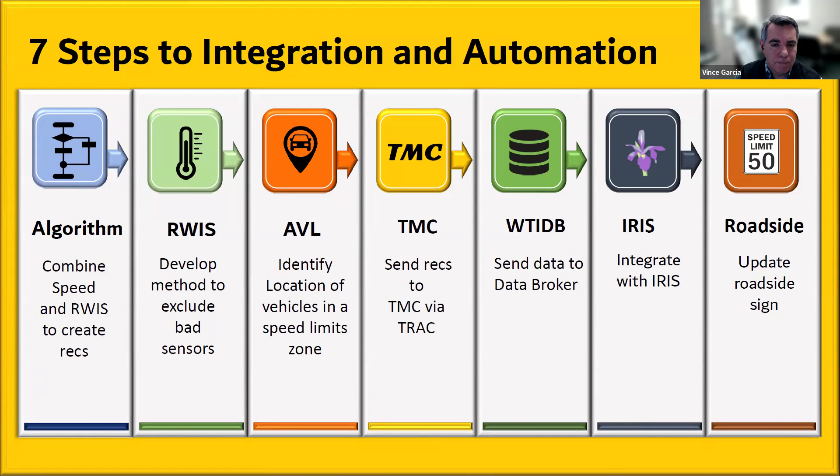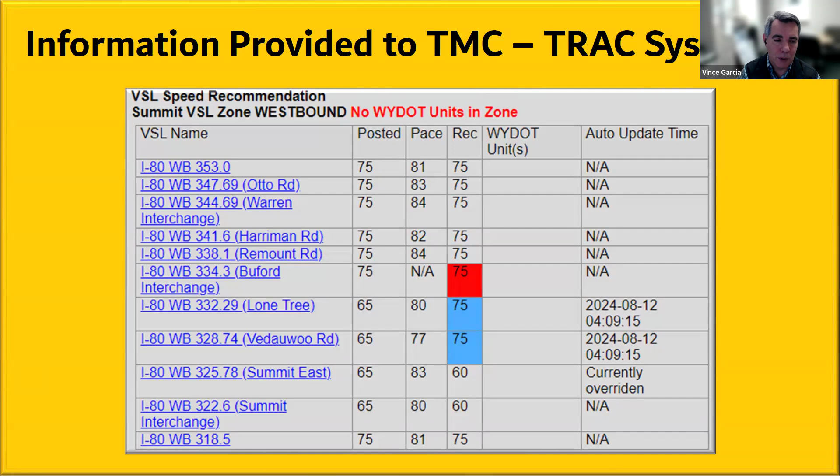Interstate 80 in Wyoming is covered by about 45% of variable speed limits. Next slide, please.

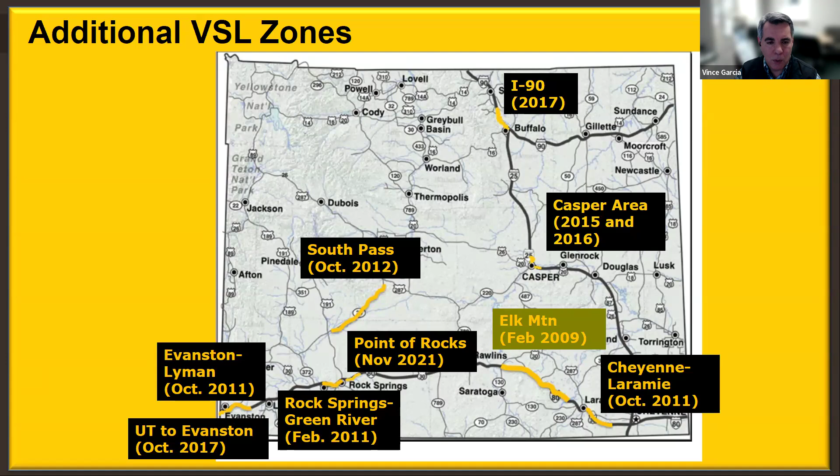I don't want anybody to go away thinking that we don't continue to have some multi-vehicle crashes, because we do. But the severity and frequency has greatly reduced with variable speed limits. I think I'm right in saying I know of one fatality that's happened due to a multi-vehicle crash in a variable speed limit zone in the last 15 years that we've been operating these. I could be wrong about that, but that's to the best of my knowledge.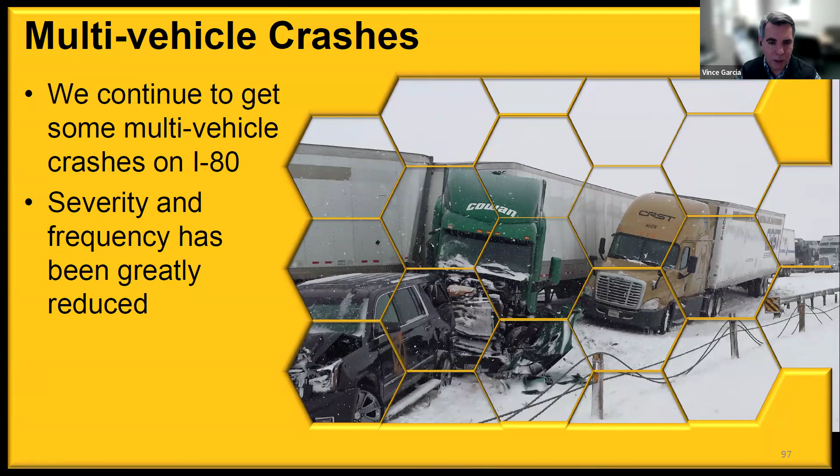Next slide, please. These two crashes that I'm showing, can you go back one just for a second? I apologize. Can you go back one slide? This crash that happened, just hold that in your memory for a second. This happened in a variable speed limit zone where we had the speeds reduced to 45 miles an hour. Next slide, please.

I will tell you that the FHWA has also done some additional research. I think it's about 3 years ago they did a report. Just reading from one line of it, they said their analysis statistically found a significant reduction in large crashes, from a 28.8% reduction in property damage only crashes to a 65.2% reduction in rear end crashes. And then they also pointed out that the benefit cost ratio for these was about 9.05 for variable speed limits in the state of Wyoming. So that's what I have for you.